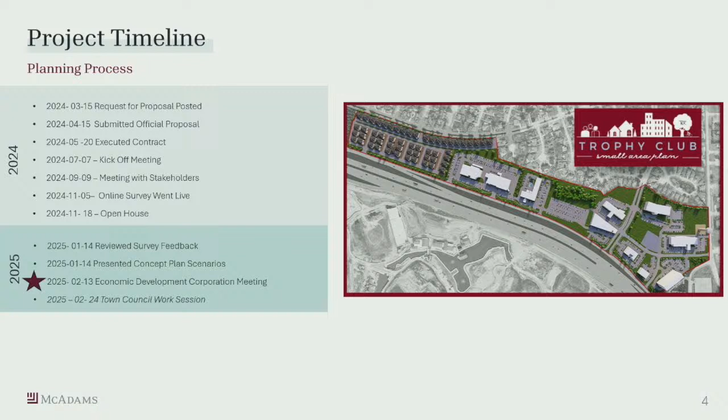The three types of community engagement methods we underwent were: meeting with all of the property owners—there was one we weren't able to meet with, but we met with every other one within the 54-acre area. It's just the property owners within this area, not outside of it, because those were invited through the open house meeting that was advertised on the town's website and things like that. Marissa will talk about those details. The third method was the online survey that went out and had a lot of participation; she'll go through that detail as well. So I'll pass it over to her.

Hi, my name is Marissa Brewer. As Randy stated, I'm a planner with McAdams. To touch on the outreach approaches we did: we first met with stakeholders, some virtually and some at Town Hall. We sent an email asking if we could meet with them to get feedback. A lot of them talked about creating a place where people would come to their businesses, but also increasing the area to be a place where people would stay and hang out. They really liked the idea of connectivity, so people could walk from their neighborhood to restaurants or hang out with their families on weekends, with open space to gather. A lot of stakeholders also said they'd like to see more small businesses come into the area—they want their business to thrive, and also want other places like coffee shops or retail to shop and eat. So that was the stakeholder approach.

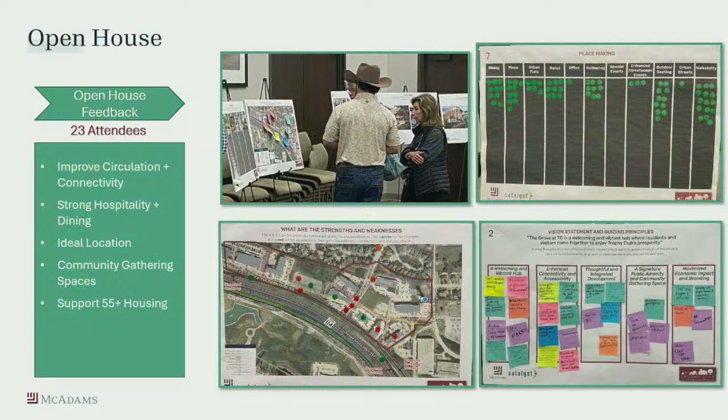And then we will pass it on to the different phases and approaches of the project for Jameson. Good, thank you. Thank you.

My name is Jameson. I'm going to try to walk us through concept A and concept B. These are concepts, long-term plans, basically looking at what is the potential for the area long-term. This could be the next 10 to 20 years. It's not something that's necessarily going to happen overnight, but they are potentials that could meet some of the market demand. So this is concept one, and I'm going to try to walk us through these plans.

I'll try to orient you first. Here's Trophy Wood Drive, right out here. This building 7 is where we're sitting tonight. You'll notice building number 9, that's HG Supply, and then 8 is Hutchins, so you can use those as your frame of reference as we move about the plan.

So concept 1 is the less aggressive of the two concepts. This keeps most of all the infrastructure intact that's currently out there today, specifically Trophy Wood Drive.

It also is kind of moving along that more suburban design approach. We've got a little bit more space between the streetscape and the building frontages. There's a lot more surface parking on this particular concept. There are some garages that are going to help serve some of the additional buildings we've added, but for the most part, just focusing on those vacant land opportunities.

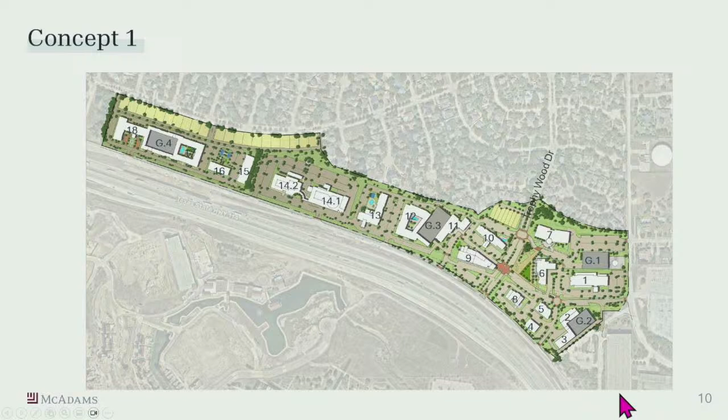Another point of clarification here—there was also a lot of concern that this is a pretty messy intersection over here, so we were also looking at maybe some cooperation with the neighbors to bring the road into our development, which would also help traffic counts into the development, but help clean up that intersection and have a single access point to kick you out if you want to get out here and make your way east once you get down the intersection.

Hey Jameson, I know we'll have opportunity to ask questions, but I want to get in my mind the parking areas 1 and 2. Is that 3 decks? Is it flat? Just conceptually, what's the thinking?

So the G2 garage, we've got some numbers here - I think they're both approximately 5 levels, which means it's 4 stories, but you can park on the top. G1 is a 3-story that you can park on top, and G2 is a 4-story that you can park on top, so 5 levels.

This plan is just color coding the plans by the uses. Here's some of the early takeoff conceptual numbers surrounding this, and the restaurant, retail, office space that you're going to be able to add to the area. You can also see by the striped zones on buildings 2 and 11 where that ground floor situation would take place in those true vertical mixed-use buildings. And then we've got the new buildings 5 and 6 coming online, with the rest being some senior living or urban living situations.

Right here in this location that splits these two properties between the townhome and the new age-restricted stuff, there is a retaining wall situation here, so that would take some rework and a ramp, basically, in that zone.

Then my question on Trophywood Drive, your concept needs a right-of-way of 106 feet. What's the current right-of-way there? I think it's 80, not 106. So where's the extra space coming from? The existing's 80. What you see here on this section, it's 80 feet from back of curb to back of curb. Got it.

So my 106 is building to building. Yes. The current's back of curb to back of curb. Okay, thank you. Concept two.

This concept is the more aggressive approach, and what we're looking to do is optimize the square footage that we can fit on your last few remaining developable parcels in town, especially this here, the southeast entrance into town.

This one does have some realignment for some of the infrastructure, and you can see right off the bat, we're coming in and taking a different swing on Trophywood Drive. We've looked to realign this from coming up, which kind of comes through Building 9, but we're looking at repositioning that and looking right up toward the front porch of Town Hall.

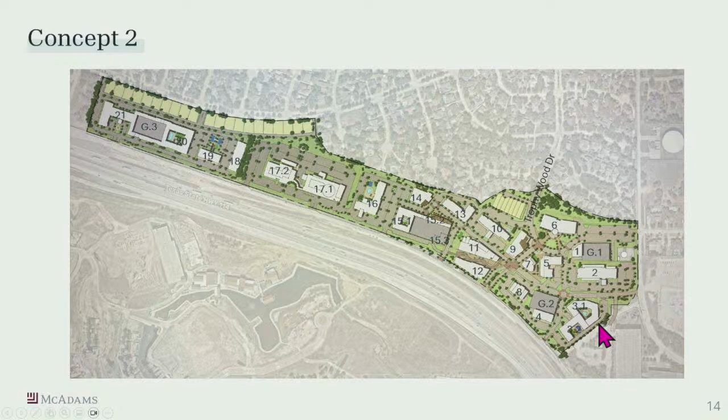This is going through the uses. You'll see an increase of uses there.

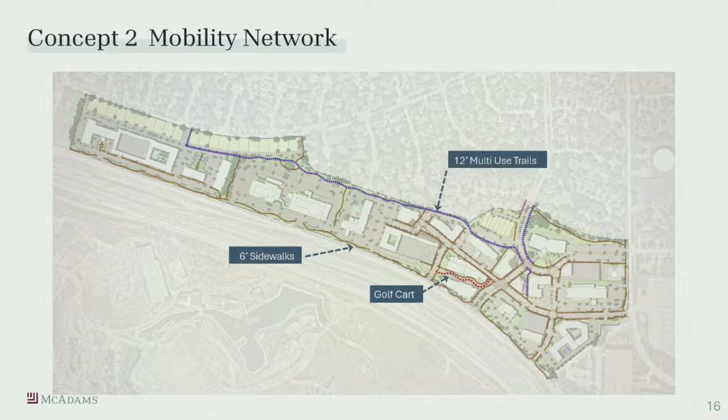Looking at the trail connections, pretty similar to concept A as far as the multi-use trail. You'll see the golf cart alley - that's kind of the golf cart zone for people to come and park and walk in the development.

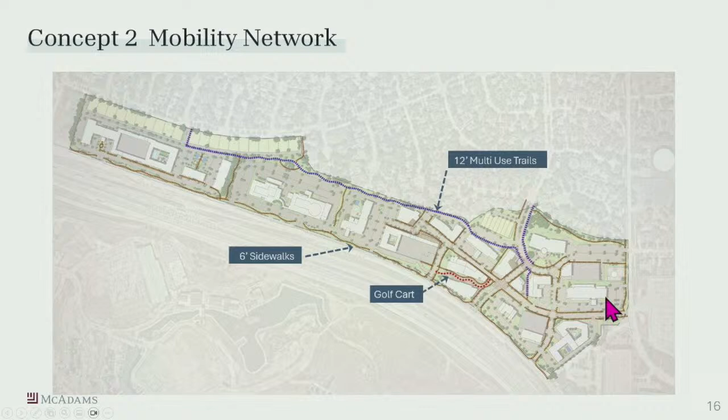And then we discussed some of the feedback, go ahead and make this work on to the east here, whether that makes its way behind Town Hall or down the power line easement, this road, making that connection further to the east.

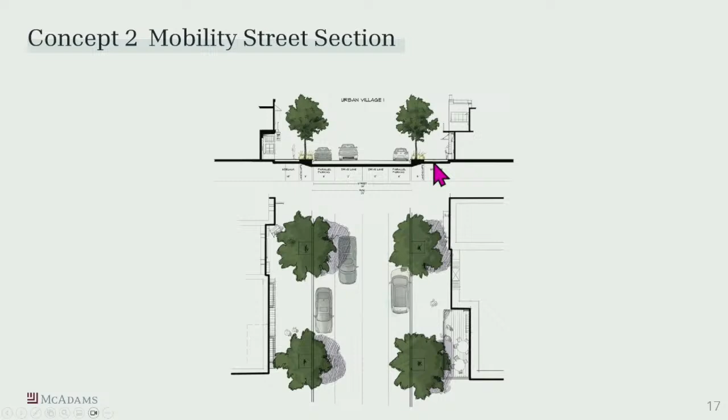With that realignment, looking at the narrower street section rather than having such an expanse of the right-of-way, bringing that in, still have the same number of traffic lanes, one north one south, but then we'll have parallel parking, and a nice streetscape where the tenant shops are more closer to engaging the street. You could have tree grates on there, but a nice walkable sidewalk along the storefronts there.

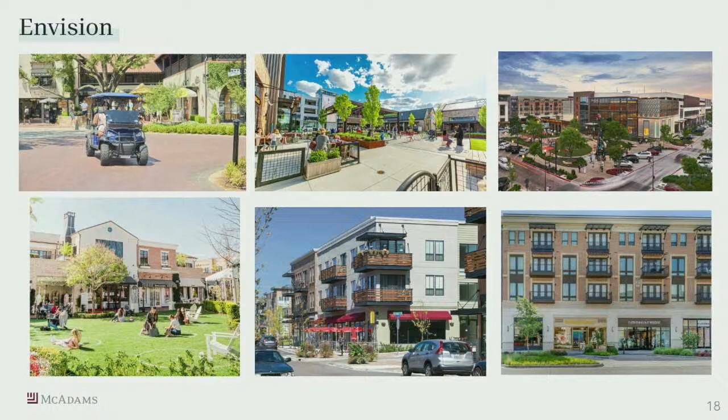And then these are just a few concept, inspirational images that show some of those different successful developments that have taken place, but something that's a little bit more scale - not looking at something like Legacy West, but looking at some scales that would potentially work here, be successful in the market.

Well, that was very in-depth detail. So what I'm thinking, we only have about 10 minutes. I'd like to use it like this: each person gets to say a comment about this, something that intrigues you, and something that you want more information about. You ready? Oh yeah.

Mayor led this off by talking about how our time is limited. Let's go ahead and schedule another workshop on this topic whenever it's relevant, since it's already 6:50.

So much was just said about specific use of particular concepts of buildings and where garages would serve and whatnot, and none of it was written. I would have loved to have seen all that in the packet. Our time together is limited, and that information could have and should have been communicated in writing, and it also would have made this session more useful.

I have a lot of things I'd love to share, but we're short on time, so I'll save my time in case we have extra.

What's exciting about it for you? I'm actually not super excited about any of it yet. We need to whittle down on it more. This isn't an excitement thing for me, it's a strategic thing, sorry. No, it's not exciting, I just want to work on it. All right, good, thank you.

Dennis, you want to talk now? I got 4 pages of negative notes. If I see residential apartments in this, any of this stuff, I'm a no vote, and I just as soon save our money and do something different.

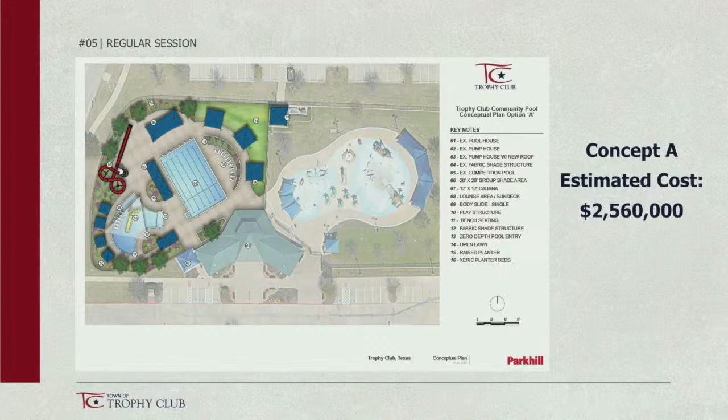Well, would A go where C is, in the C concept? So if you look at A, that slide, yep, so option C, we're adding more shade around the kid pool. Whereas in option A, that slide is moving more into that shade area. And so that was one of those things that we took from Park Board, saying, well, we like the slide, but we also want to maintain that shade. And we're going to have to redesign with all these comments.

Tonight is just giving us a general idea going forward of what approach you want us to take. Approach being A, B, or C? Correct, or all the comments that you've heard, to include into a final approach, i.e. C? Correct.

Because that is the recommendation the Park Board recommended. Correct. And so I would like for us to stay with concept C and include the comments made here. Are y'all in agreement with that? The park board discussed it and made the decision. I do too. It's a nice concept. I will add, obviously y'all pointed out that slide's more expensive than the one on option A, but the smaller footprint has benefits too, so y'all are gonna be on the drawing board on several aspects of this no matter what. So I agree with C.

I love shade, and I love being on budget. The sun shines heavy and hot.

I have a question, actually 3, because one's to Brandon. Going back to what Dennis said, the opposite of that, you put something like this in place - he was asking about increase in budget and things like that. When you put something like this in place, in your opinion, has that brought in more money to offset some of that? When you put in structures and other playthings, does that help bring in more dollars?